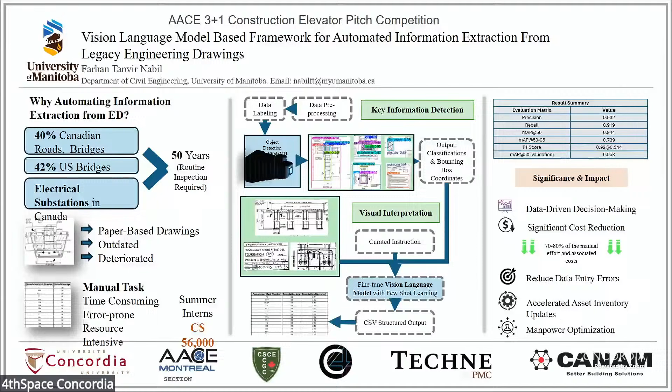Okay, go ahead. Okay, good evening, everyone. We are developing a vision language model-based framework that will automate the process of extracting information from legacy engineering drawings. Now, you may ask why we need to automate this process, right?

So, our cities and nations depend on civil infrastructures such as roads, bridges, power grids. Most of the power grids in Canada, 40% of Canadian roads and bridges, and 42% of bridges in the US are over 50 years old. Managing these infrastructures is critical, and maintaining them requires regular inspections, and that necessitates accurate information of the assets.

The challenge is these assets, being decades-old infrastructures, are mostly documented in paper-based construction blueprints, which are outdated and deteriorated. As engineers and interns, we face this situation where we have to deal with complex, overwhelming stacks of construction drawings, and extracting data from them manually is very time-consuming, error-prone, and resource-intensive.

Even companies hire summer interns to do this laborious work, while the interns get paid $56,000 if we calculate yearly, which is a very inefficient way of using your talent and expense.

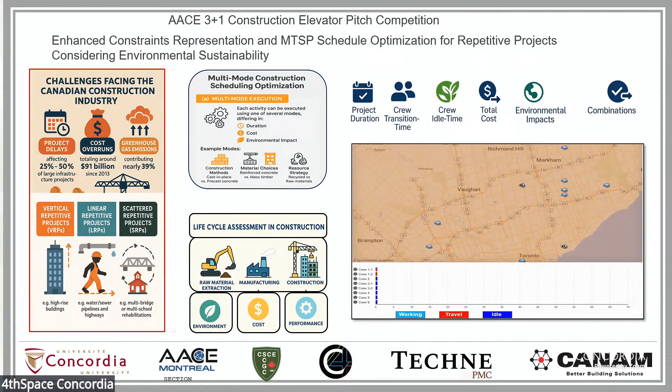Good afternoon, everyone. I am Eunbin Jung, a PhD candidate at International University in South Korea.

Today, I will present about a dual approach of precast concrete installation time prediction. In precast concrete, which we call PC construction, accurate installation time prediction is crucial.

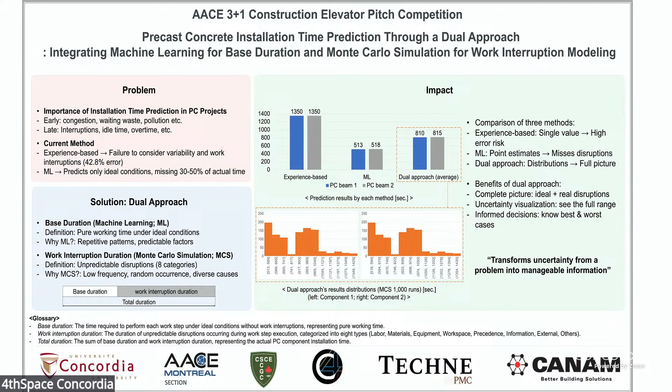The proposed dual approach transforms uncertainty from a problem into manageable information. Thank you for listening. That concludes the presentation for theme 1.

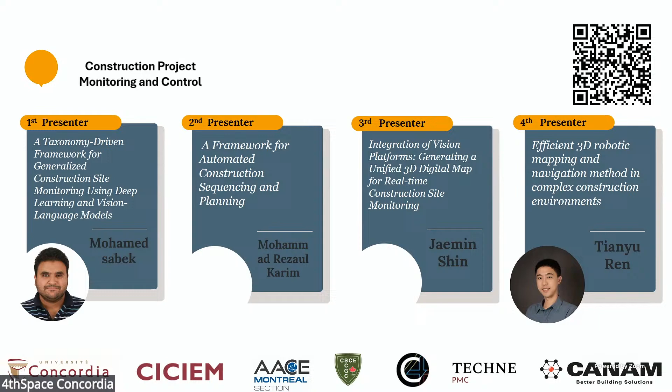Hello. Hello, Mohammed. How are you? Good. Are you ready? Yeah. Okay, so you have 4 minutes, and your time starts now. Go ahead, please.

Hello, everyone. My name is Mohamed Sabek. I'm a PhD candidate at the University of Alberta. Today, I'm going to present our research to you.

I want you to imagine this situation: a construction worker falls from a ladder on the construction site and it goes unnoticed, or a fire hazard starts somewhere and again goes unnoticed. Unfortunately, similar events keep happening on a daily basis on construction sites all over the place. It's not random — these things happen and impact people's lives. It can even sometimes shut down whole construction projects or increase the budget by $1 million if insurance claims start to become part of the situation.

So this is the problem statement that we're trying to focus on: the safety issues within the construction industry. Unfortunately, the construction industry has one of the lowest efficiency rates compared to other industries like manufacturing and agriculture. We're having a very low safety rate compared to other industries.

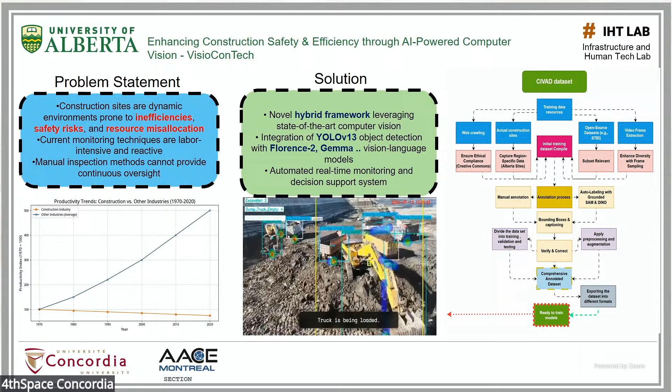And tracking all the equipment, identifying the busy zones, identifying if any safety incidents happen. Out of all of this, the sky is the limit for the kind of outputs we can get. We can increase efficiency, we can save people's lives, we can identify the weak points or inefficient processes in any construction site.

Basically, to conclude, we're trying to give construction site monitoring systems eyes with an accurate estimation of each thing happening within that environment. Thank you very much.

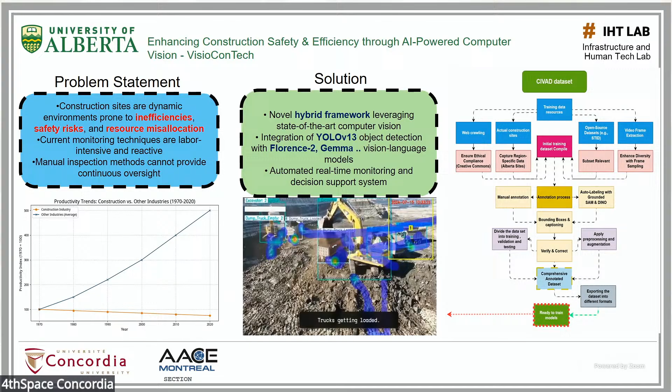So for the safety things, what I mean is that if someone falls on the ground right now, using our system, we implemented a hybrid technique, not using only object detection models, which is the norm in such situations. We're also using VLM models that we fine-tuned using our own dataset. That VLM is capable of detecting safety issues, like someone falling on the ground, a fire hazard starting to appear, smoke starting to appear from somewhere, if there is oil on the ground, or in that situation specifically, if there are cracks on that hill, we can detect that.

Because VLMs are really good at something called zero-shot detection. Zero-shot gives them the ability to understand and detect situations that they didn't even train for.

So I would think this computer vision zooms in if there's an issue or a problem area. Yeah, exactly. For instance, if someone fell on the ground in this location, a screenshot will be detected, like a close-up one. That screenshot will be sent via email or a notification to the safety officer, the project manager, anyone involved, so they will know that happened.

The good thing about this system is that we're trying to identify near misses—the safety incidents that usually happen in a daily manner but go underreported. With these systems, we can detect these situations and prevent them in the future.

Hello, Jaemin. Are you ready? Yep. So please go ahead. Good afternoon, everyone. My name is Jaemin Shin.

Today I'd like to discuss a methodology to integrate multiple vision platforms on construction sites through a unified 3D map for digital twins. Various vision platforms are utilized to manage construction sites using their own strengths. For example, terrestrial laser scanner is largely used for structure inspection because it can generate high precision models. UAV can produce rapid and wide views of the site, ideal for overall site mapping. CCTV can capture continuous time series data, useful for tasks like productivity analysis over time.

However, these vision platforms also have inherent limitations. TLS is very slow and requires manual operation, so it's not practical for large-scale site mapping. UAV is usually deployed at high altitude and produces a top view, so it has low resolution and misses vertical surfaces. CCTV has limited view and is prone to tracking errors, especially in complex scenes.

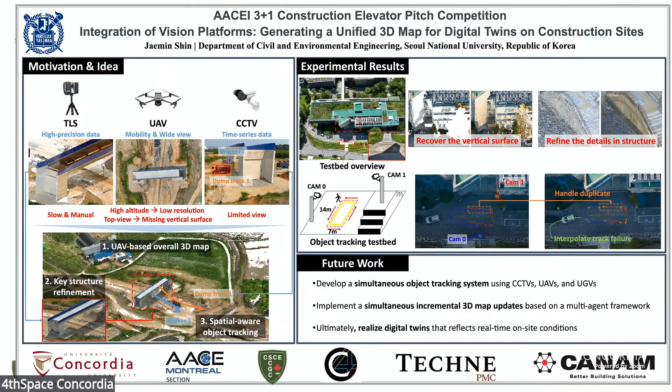Yes, thank you by the way. Interested about the digital twins, realized digital twins reflects real-time on-site conditions. Are we talking about progress measurement here, or the objective of having this data, tracing this data, is it for tracking progress, or what's the ultimate purpose?

At first, it only tracked the position of the dynamic objects, but after we implement the accurate object tracking, we can add some dynamic information like activity analysis and similar. So yeah, we can extend the usability.

Right, so you're using sensors and other methods to measure this, to create the 3D map. You're using sensors, other ways as well, not just the video, but sensors to determine this. Okay, thank you.

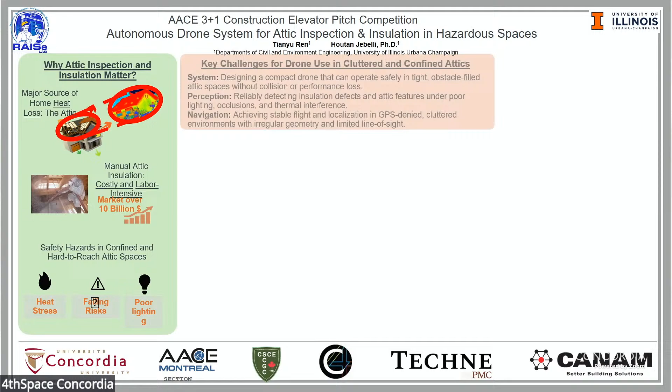However, there are some key challenges here. First, the system needs to be compact and agile in confined spaces. Second, the perception needs to be reliable in detecting insulation defects and structures under poor lighting conditions.

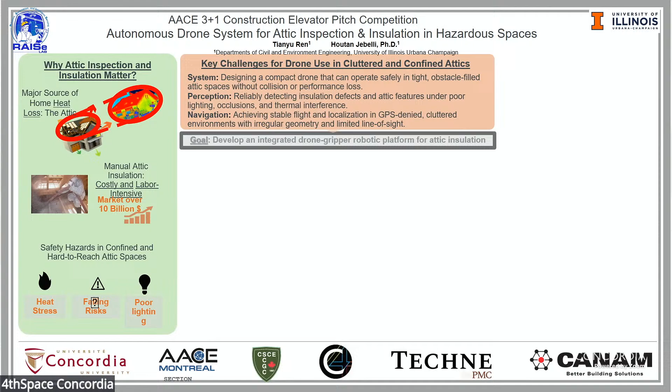For navigation, it should work in this GPS-denied cluttered space, which means real-time localization and obstacle avoidance are needed for safety issues. Therefore, we developed an integrated drone gripper robotic platform.

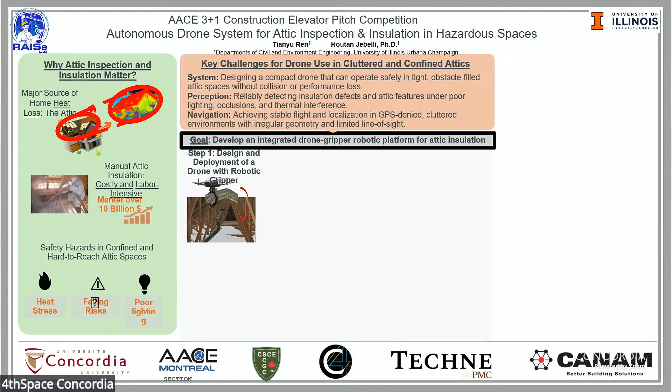First, we designed a drone with a robotic gripper, which holds a hose to spray insulation materials. Then we have a thermal visual perception engine, which uses a convolutional neural network to track the insulation conditions. We also incorporate simultaneous localization and mapping with LiDAR data to reconstruct a 3D map of the environment.

After that, we have our autonomous navigation system, which starts from a grid-based navigation system that gives an initial estimation of the path based on the map. Then we refine this path using a reinforcement learning network to adapt it to any environmental changes.

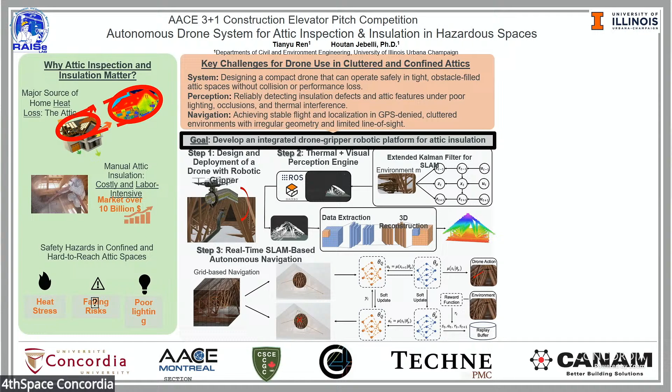Then the results from the experiment look promising. First, we have 96% mapping intersection over union, which means our map is a close representation of the real environment. We also have 90% classification mean average precision, which means our system can differentiate between different elements.

And for navigation, we have a 95% success rate, which outperforms many state-of-the-art methods. Our solution also has a collaboration success rate of 92% with human workers, where our system can predict the intention and movement of the workers and collaborate with them.

So in conclusion, our system has both practical and technical contributions. For practical contributions, we provided a solution to automate attic insulation work, which is a safer, cost-effective, and more efficient way. For technical contributions, it goes beyond attic insulation.

First, we have a perception module that allows the drone to perceive the 3D environment, build the 3D map, and recognize different elements in the environment. For navigation, it ensures both efficiency and adaptability, which outperforms many existing methods in indoor construction environments.

We also provide a solution for the drones to collaborate with human workers, like estimating and predicting the movement and intention of the human worker, to allow the drones to work in close range with these workers. Therefore, this method paves the way for safer and automated construction operations in the future.

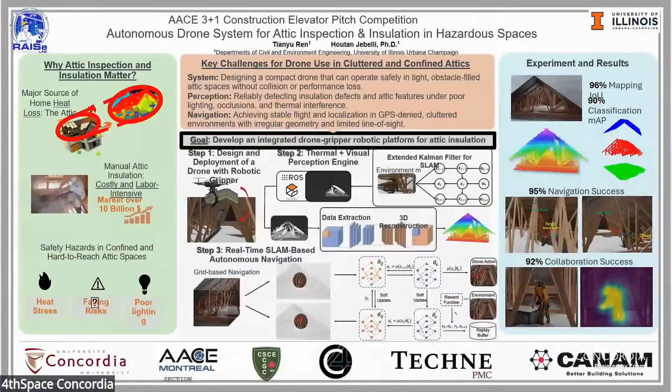That makes good sense. I was just confused by the image — it looked like an infrared image of a person. Oh, sorry, this is his trajectory of movement, like his intention when bending down.

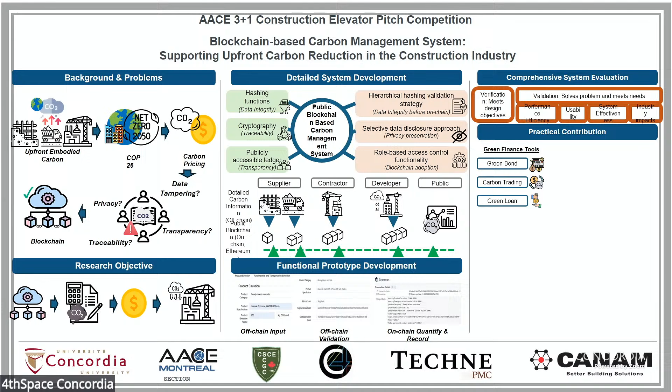The contribution is in green finance. Green finance tools include green bonds, carbon trading, and green loans. The proposed system provides more accurate and transparent data to support green finance activities. As a result, the project team gains access to more capital that can be used to select greener materials, greener site activities, and greener transportation modes.

In summary, my research proposes a novel blockchain-based system to enhance carbon data in terms of accuracy, traceability, transparency, and privacy, as well as linking it to green finance for upfront and embodied carbon reduction. Thank you.

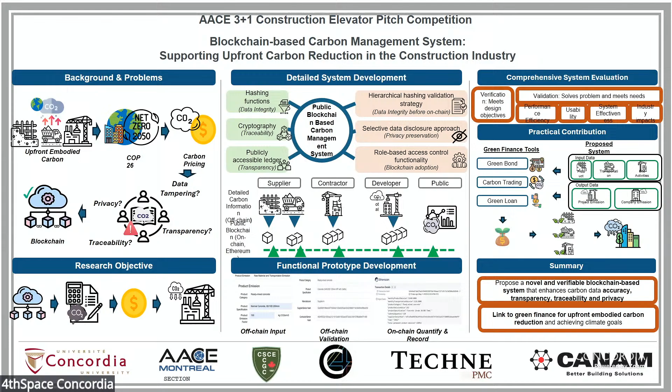I understand that you've spent a lot of energy on the security piece of the solution to make sure that everybody trusts the system. What will be the advantage of using this system compared to the commercial solutions that are available out there currently? What is it that you're offering more than what's already on the market? There are other solutions for exchange of carbon credits in the market—what advantage does your system have over what is already being used in the industry?

At the beginning, we interviewed stakeholders in the market to identify their concerns. When we reached out to banks, their major concern was whether the carbon data from the project team or developer is accurate, since it relates to money, and once it relates to money, the accuracy of carbon data becomes very important. My system tries to ensure, first, data integrity, because in the whole supply chain we get different data from different parties. Traceability is another big issue. Also, in current existing upfront and embodied carbon accounting, the popular approach is missing data because they only show the good data, leading to greenwashing problems. By using our system, we can first ensure data integrity, trace all the data along the construction supply chain, and also include the parties that are usually missing from the system. Thank you very much.

Today, I'm going to present my research by answering three main questions: how, what, and why. So first of all, why this topic? Environmental challenges is not something that we can ignore anymore. And construction industry is one of the key contributors, but it's also responsible as a big solution.

So moving towards circular construction and using materials as long as possible is one of the best ways. Reusing structural components can be one of the valuable options, as it keeps materials as they are as long as possible with the least amount of processing. As a result, it will reduce the carbon emissions and environmental impact even further.

Comparing to other options like recycling. But of course, it's not that simple. There are many challenges to reuse, like costs, like complexity of working with these reusable components, and unavailable information on the reusable components.

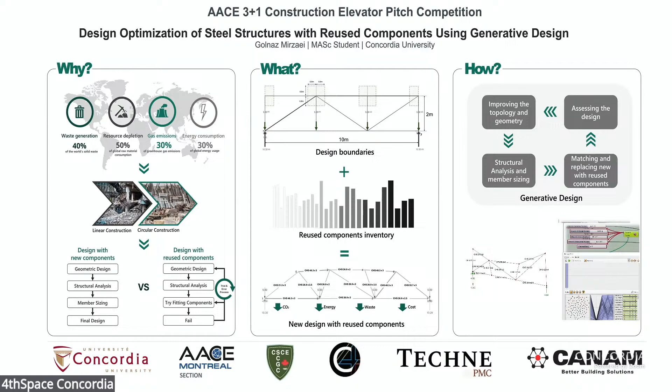So in a case study we did, in a simple steel wire truss, 56% was achieved on the reduction of carbon emission and 64% in energy usage. So all we are saying is by rethinking how we are designing, we can move toward removing the barriers of reuse and also making circular construction not just achievable, but the new standard. Thank you.

Thank you. Does your system allow for cutting of components? Yes, it does, but it tries to minimize the cutoff waste so that there would be less waste and it would be more efficient. The design would be more efficient.

Thanks. I'm wondering what are the inputs of your system to allow the designer to change a brand new beam, for example, for a reuse beam?

Sorry, can you repeat your question? What are the inputs of your system to allow the designer to choose between a brand new beam and a reused one? Okay, so I think you're asking what can be used to assess the design.

What factors are considered in matching the new and reused components? It can be based on different criteria, which is important for us. It can be based on the functionality of the component, or the location of the component. It can also be about the size, how big it is compared to the component that we need - the closer it is, the better. All of this is reflected in the function that we develop for the system.

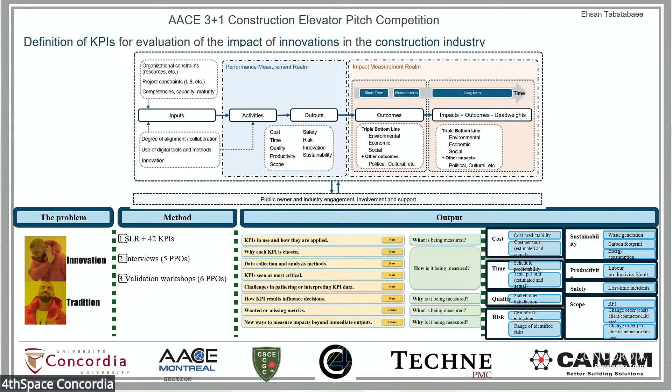Hi, thanks very much. KPIs are key in project reporting, there's no doubt about it. In your research of those KPIs that you've got on the board, which ones had the most gravity, the biggest weight factor for your research?

Of course, you're absolutely right. So basically, what we have in place with 5 major public project owners of Quebec, cost and time KPIs still dominate. I will present all these results at the conferences, but what I can say is that they are only focused on time and cost, and just a few of them are looking for safety, which is kind of interesting.

Well, safety, that's true. Safety should really be at the top of the list in terms of KPIs, but surprisingly, it was not.

Yeah, cost and schedule, I understand. You've got earned value management, cost index, schedule performance index. That makes a lot of sense.

Okay, thank you. But hopefully we are addressing more sustainable KPIs. There is a need to address more of that list of KPIs. I do like the fact that you've identified scope and scope change, because that is a major torpedo in many projects, right? It sinks a lot of projects.

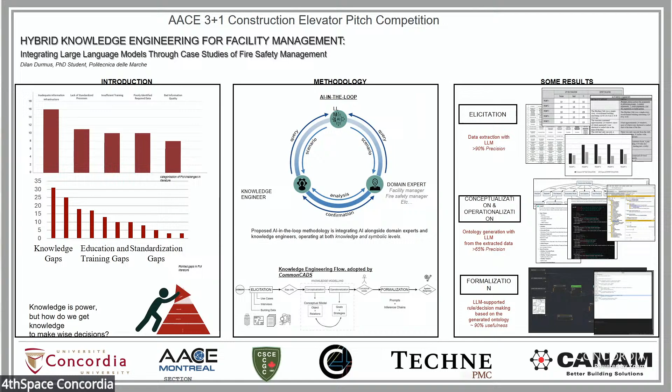I can say that the answer is not in the tool, but in the information flow of the tool. We need frameworks, not just prompts. We need conceptualization, operationalization, formalization, that are the core steps of the established knowledge engineering methodologies. AI is not here to replace us. So my research lays a foundation for not just automation, but innovative and responsible intelligent built environment. Thank you so much.